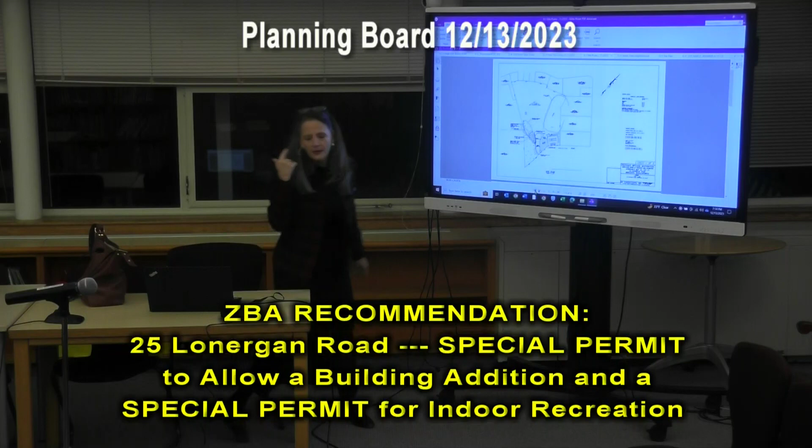So basically, this is 25 Lonergan Road. I apologize, Jill Mann here on behalf of 5H LLC, the owner and operator of the Paradise Golf Range, miniature golf and simulators, located at 25 Lonergan Road. So everybody knows it's that last right-hand turn if you're going out of Middleton toward Danvers, right between Fast Freddy's and St. Cyr Pool. It's all the way down the end. It's a very popular Middleton location for mini golf and driving range.

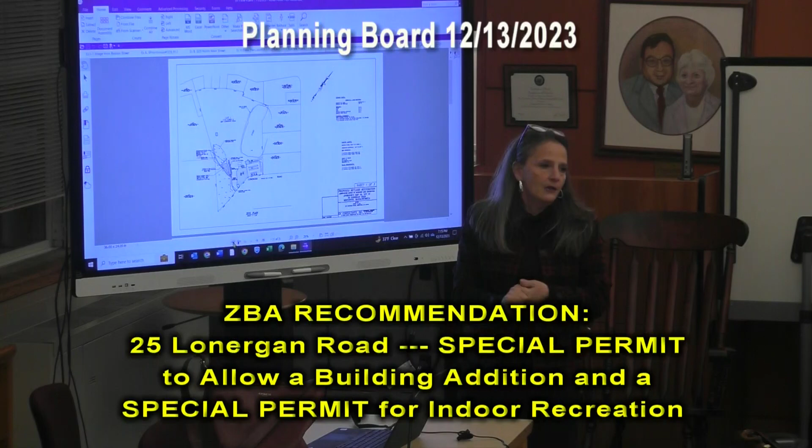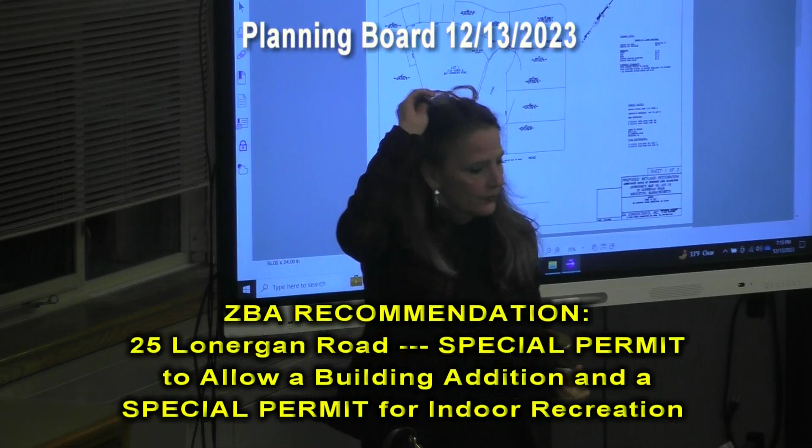So this particular petition is in order to expand the current simulators. Back in 2015, I brought forward a project for a very small building, about 1,000 square feet, with one simulator addition. We did that, and afterward the owner discovered these simulators are very popular, not only for lessons but also because people love to come in and play inside during inclement weather. This use is absolutely controlled by weather since it's all outdoors. So believing this is a good way to generate revenue, he's proposing an addition of 900 square feet to the simulator building, adding 2 golf simulators. I'm going to flip through this plan.

That first plan shows the general property. It's 17 acres, very large. It doesn't include the pond, but it's right next to it, and extends one property back from River Street. The property has a big wetland buffer and wetland on it, and there's a lot of floodplain in the area as well. But all of that can be compensated for and mitigated.

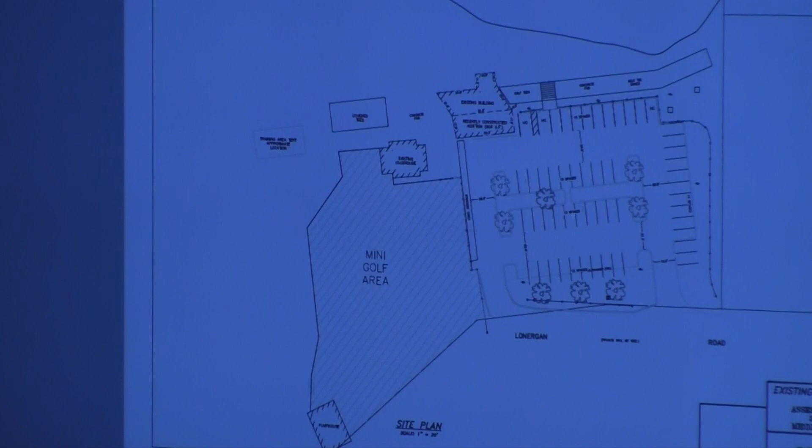This project did go before the Conservation Commission because there were issues relative to where the wetlands were, whether they'd been filled historically. So the owner went back to the Conservation Commission and got an order of resource area delineation, identifying where the wetlands are, and everybody's comfortable now. Ms. Kent pointed out that where they're trying to put the new simulator building, they're in the floodplain. But when you're located in the floodplain, you can compensate, just like with wetlands—you can fill up to 5,000 square feet as long as you replicate it in another area, and that's exactly what they're going to do.

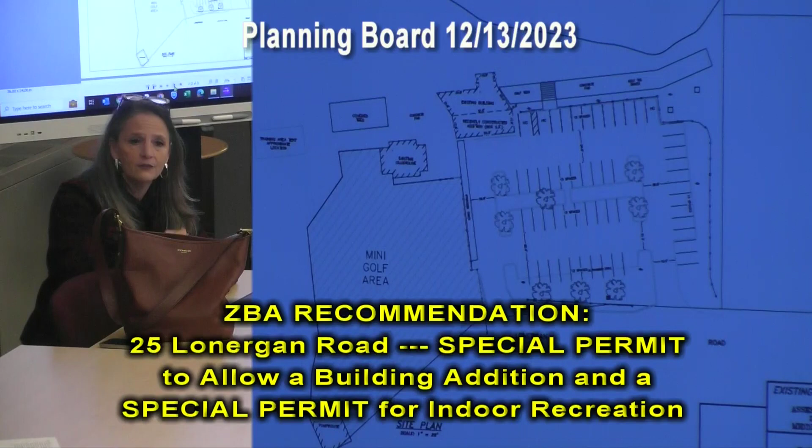Kristen Kent, the conservation agent, asked that we go through this process before coming to her, to make sure any tweaks needed would be handled in her subsequent order of conditions. There's already an order of conditions for other parts of this facility, and I'll file a new notice of intent for this particular addition as well.

So where the addition is located—can you see my hand? Yep, you can. Okay, let me make this bigger. So here you have the existing building, that's where the existing simulator is, and you see the recently constructed addition—that's because the owner might have started work before he got his permits.

He's been on a cease and desist and has not continued to do that, and recognizes that he needs to come before the committees and boards, and is doing so.

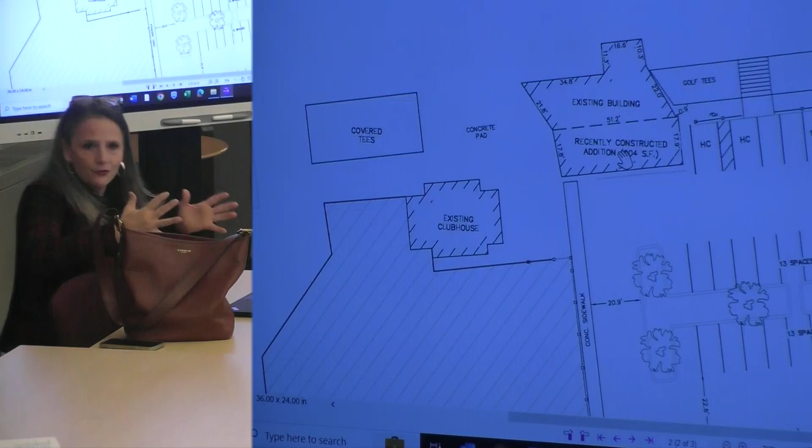So basically, all we're doing is taking that existing building, coming back toward the parking lot, and reconfiguring the parking to go from 54 spaces to 65 spaces. Why? Because when it's high time, they really do need the spaces. Although back there, you can park on Lonergan. It's not like parking on 114 or something else—there's space.

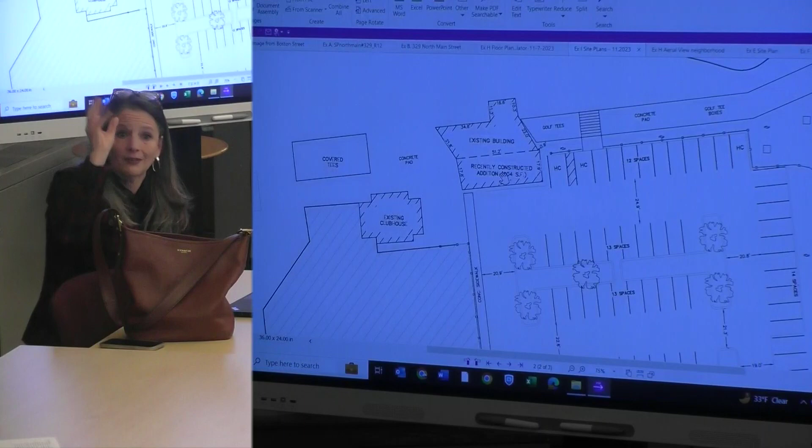But that's literally the whole project in a nutshell: adding a 900 square foot building and perfecting that site plan change, and then showing additional parking. And by the way, we're not increasing any impervious area. So as it stands, it's literally that property with a little attachment to the building.

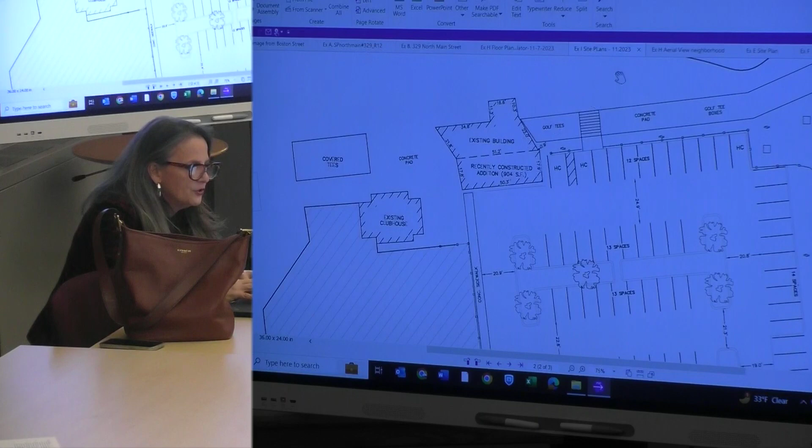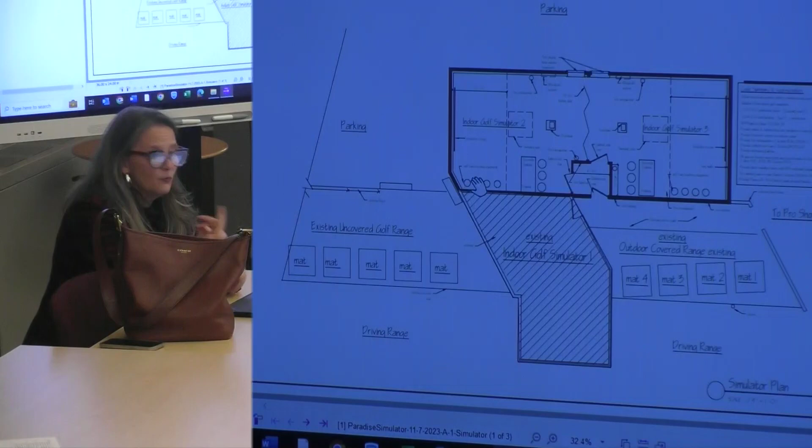I do have an architectural plan as well that I can show you. Here's a close-up of the actual insides of the building. On each side you have the driving ranges, where the tees are, where you hit the balls. And you can see where the existing simulator is, and where the proposed addition is—we show the two simulators. And then I can show you the actual building.

So it just looks like that—kind of pretty, looks like a barn. All the structures out there kind of look like a barn, very similar to other recreational uses along 114.

And that's really it. So we're going to the Board of Appeals tomorrow night. This particular request requires a special permit because indoor recreational use does, and then a modification to the existing site plan that had been approved in 2015. So if you have any questions, I'd love to answer them.

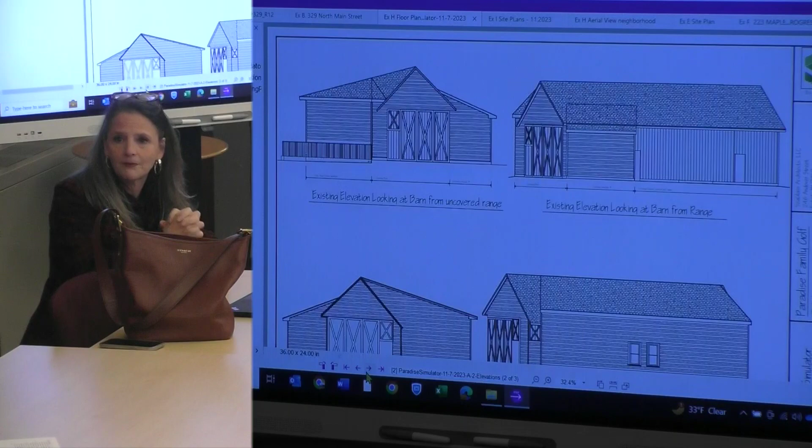I have a question—how many square feet are you recreating when you give them back on the other side, on the floodplain? It's 1-to-1 usually, but that's subject to the Conservation Commission—they can say they want a little more, but it always has to be at least 1-to-1 for floodplain replication.

And you have enough room to do that? Yes. It takes up other upland, so when you replicate floodplain, even though it might be out of the wetland, you usually have to replicate it in an upland portion. So you have to take land that is otherwise above the floodplain, dig it out, and make basically flood storage, so if the property does flood, there's another place for the water to go.

Okay, thanks. And it doesn't look like there's any food and beverage or anything. Not in that building—that building is purely the golf simulators. Now, similar to other recreational indoor uses with similar facilities, you can have food delivered or take it from outside. Same thing here—you can bring food and drink in and enjoy the simulators. But he doesn't have it in that building.

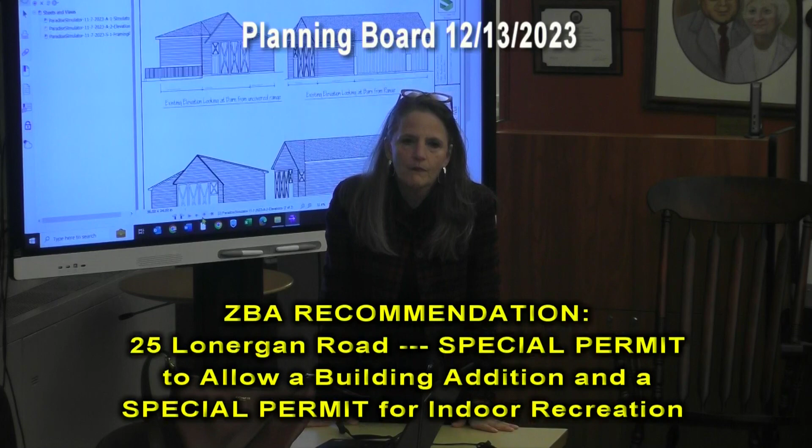Very good. Does anyone have any other additional questions? That's good.

So we will be making a recommendation in regards to provision of water, wastewater disposal, stormwater management, roadway access design and construction, as well as provision of utilities. In lieu of that, I will entertain a motion for a recommendation to the ZBA. I'll make a motion that the proposed addition is within standards.

Perfect, so Jason has a positive recommendation to the ZBA. Do I have a second? I'll second that. All in favor? Aye.

Thank you very much, appreciate it. Glad to hear they're doing well and expanding. Yeah, it's a great little facility. It's great for the wintertime too—people aren't going to be outside using the mats. Bring your daughter, she should learn to golf now, she's at the right age. I know, I wish.

All right, moving on to another ZBA recommendation for 223 Maple Street. The applicant is Middleton Management LLC, seeking site plan approval from the ZBA for a modified site plan for a new use, that being a liquor store.

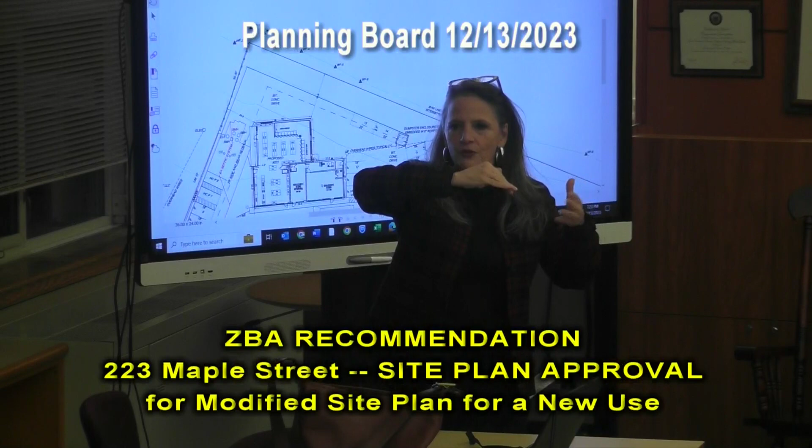Jill Mann here on behalf of Middleton Management LLC, the owner of the property located at 223 Maple Street. Everybody knows this property—it's the one that used to be run by Mike LeClaire. It's right across the street from Bouchard's, right next door to Magical Beginnings. It's a triangular-shaped property with 8 gas tanks, self-pumping.

Over the years this has been transferred to Mukesh Patel, who was a resident of Middleton. He and his wife have owned this particular business and rent out most of the units, including the gas station, which is rented to a third party.

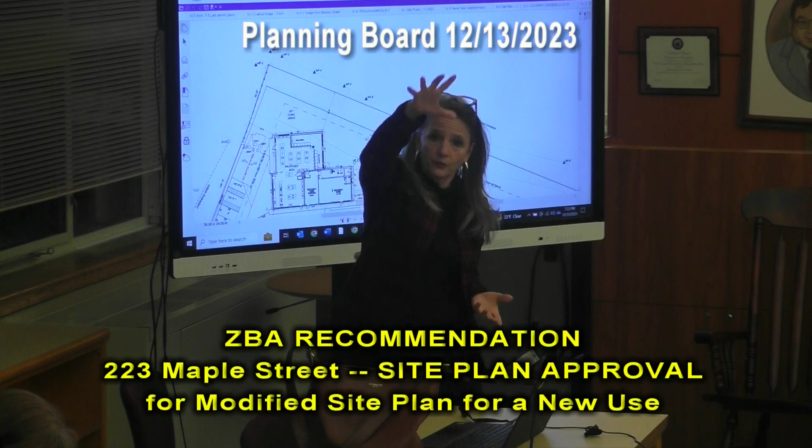Over the years, Mr. Patel has decided that he would really like to transition the property and try to get away from the automotive repair facility located behind the building. A lot of us used to go there—it's literally motor repair. The auto body is next door at Captain Pizza, but this was pure motor repair.

So the leases are up for the auto repair facility as well as that car detailing place—remember Pace? They used to be in the other segment of it. He is choosing to combine that automotive detailing business with the automotive retail business, taking away that industrial use and converting it to a retail store.

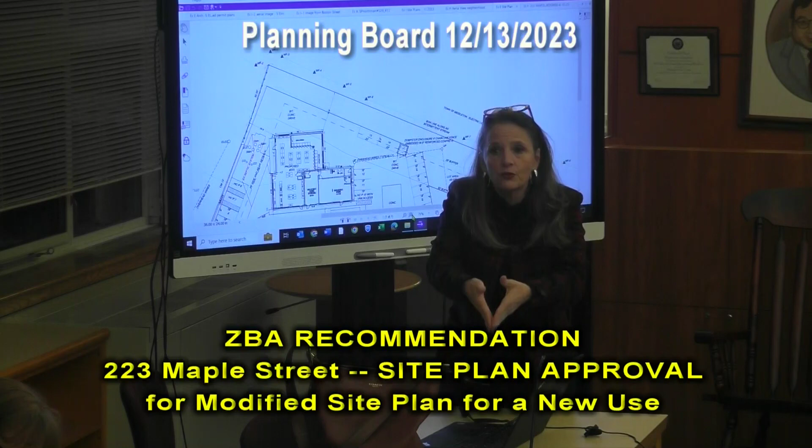Back in the spring of 2023, the town voted to have home rule petitions, which meant we got to add a couple of, I think it was 4, all-alcohol licenses—might not have been, because there was some beer and wine as well. So this was one of what we call a home rule petition that was granted to the entity that is now going to take over those 2 spaces. I think it's called MRU.

So there is an existing all-purpose, all-alcohol license for this property covering those 2 combined units, about 2,100 square feet. Even though it's an existing building and we're literally doing nothing to the site, it's a substantial change in use—you're going from that industrial use to a retail use, and now you're going to have people coming in and out of the building. So we're required to seek site plan approval or modification, because there was an existing site plan approval. There's no special permit necessary for this.

So what we've done is simply provide you the plans, which show 30 parking spaces. The original plan that was submitted showed less—only 23, because that's really what's required. However, when they applied for their liquor license, they showed 30 parking spaces, so we're required to comply with the conditions of that license, meaning there are 30 parking spaces on site.

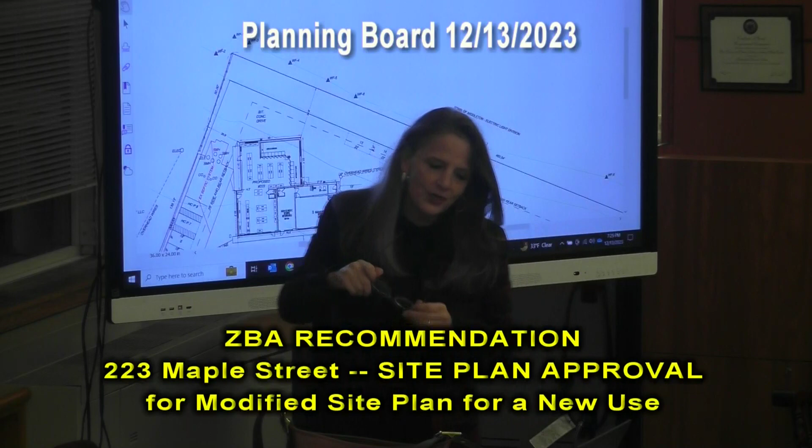I will note that the spaces have been slightly reconfigured along the back. Let me find the correct plan—I had it prepared in December. I'm just trying to locate the extra plan I set aside.

This is the new plan, sorry about that, it's up on the screen now. I did send this to Ms. O'Leary, so you might have it in your system, but I can't promise that you do. The plan before you with the 30 parking spaces is the correct plan.

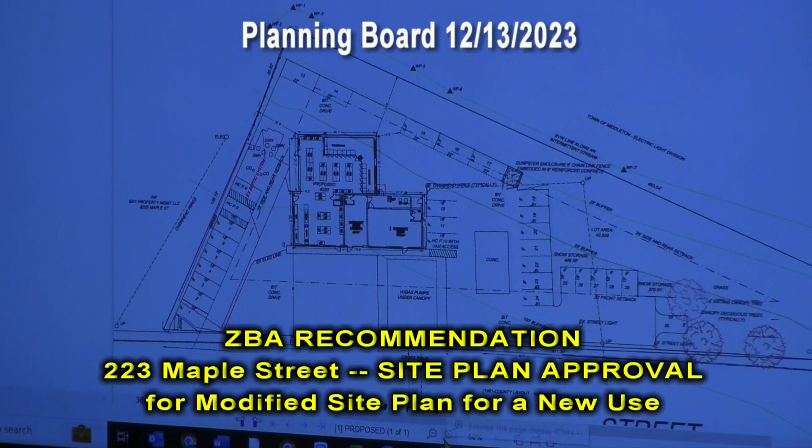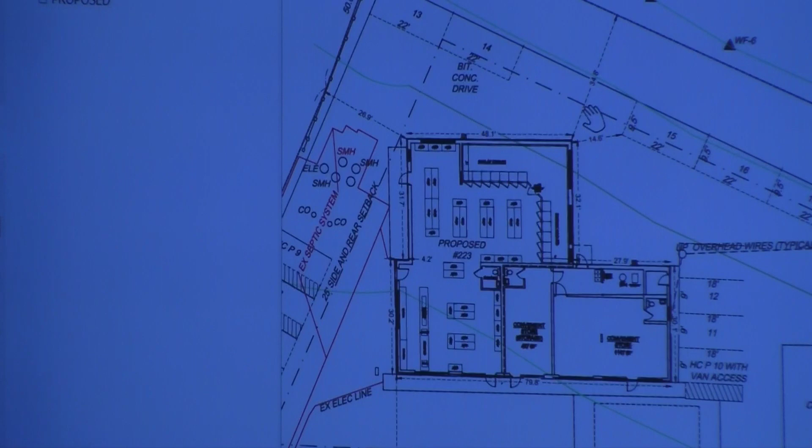I'll show you where the old uses were—this unit here with basically their liquor shelves, and there's the combination of the 2 buildings. What we did was reconfigure the back parking spaces so that they didn't have any interference from projects going on around the site. That's why.

Is he planning to operate the liquor store himself, or lease this out similar to how he leases the other spaces? Middleton Management owns it, so he's leasing it to another company—it's an independent arrangement. LLCs are considered persons, so yes, they're all arm's length deals with another company.

So the purpose of tonight is simply to say, pursuant to the application, there's no modifications to the outside. The stormwater management plan continues to be in effect. The septic system can handle the flow. As far as lighting goes, it's the same lighting that's there presently. We're not proposing to do more.

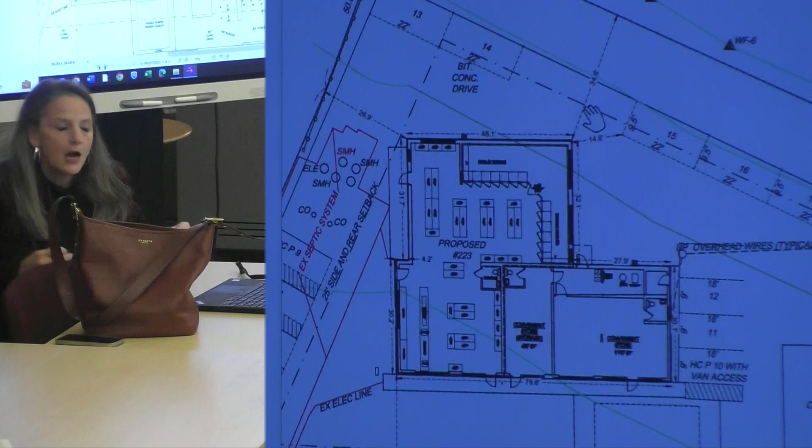We'll have probably pedestrian lights over the doors of access on the side where they hadn't been, because the main access for the liquor store is actually right here on the corner. We have one front access, but because the parking spaces are on the side, people are going to enter through the side.

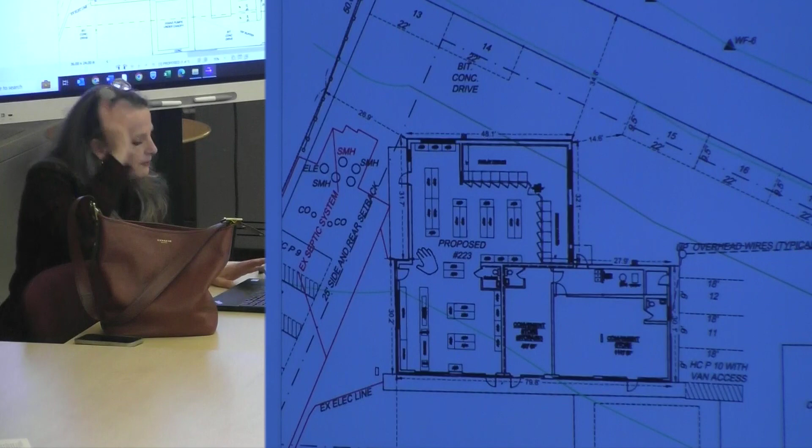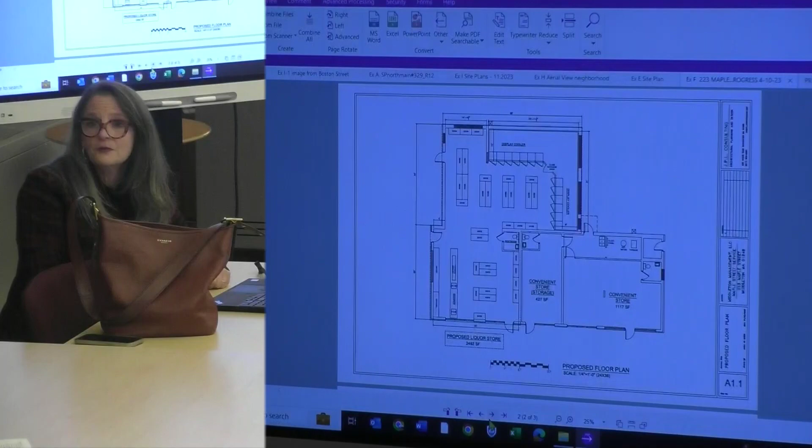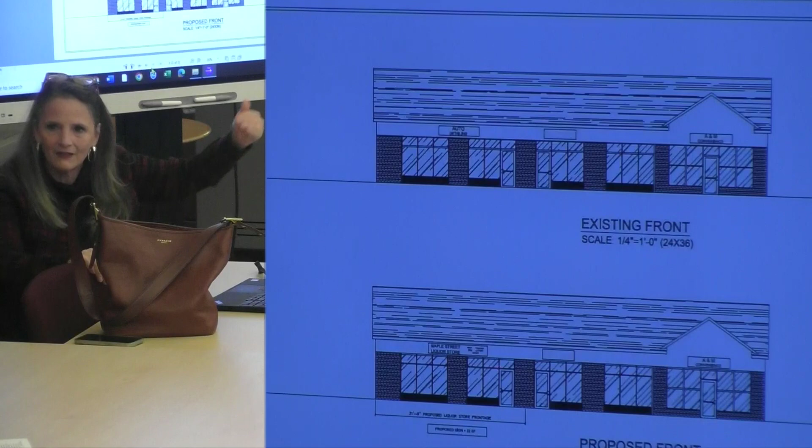For the most part, it looks pretty much the same, doesn't it? It'll still have all the glass, just now there'll be signage over that one door. On the side, if you've ever been there, it has an overhead door where they used to pull in for the detailing, and behind that the buildings, so it'll all be standard retail glass. That's basically it for 223 Maple Street, if you have any questions.

Hearing none, I'll entertain a motion to make a positive or negative recommendation to the ZBA. I make a positive recommendation to the ZBA to approve the proposed change. Do I have a second? I'll second that. All in favor? Aye. Passes unanimously. Thank you very much.

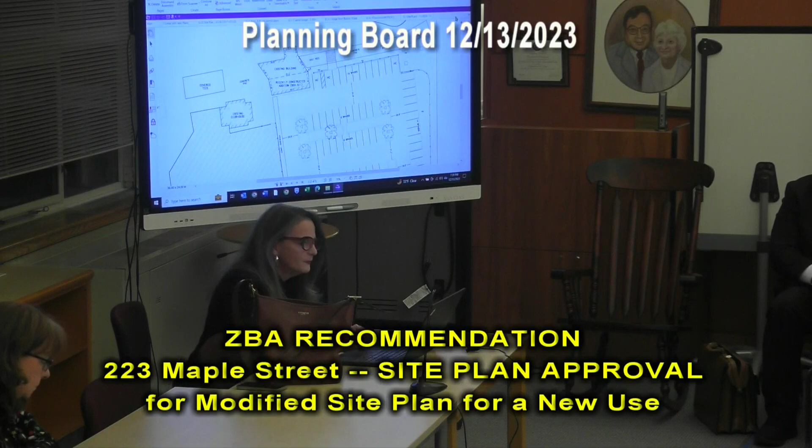And we have one more ZBA recommendation to make for 329 North Main Street, application 189 North Main Street LLC, looking to make a modification to the special permit and site plan approval allowing indoor recreational use for a pickleball court. Good evening, Jill Mann here on behalf of 189 North Main Street LLC, the owner of the property located at 329 North Main Street.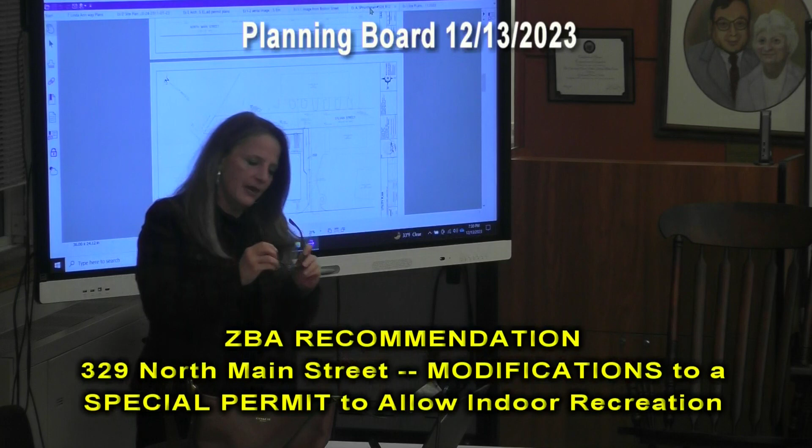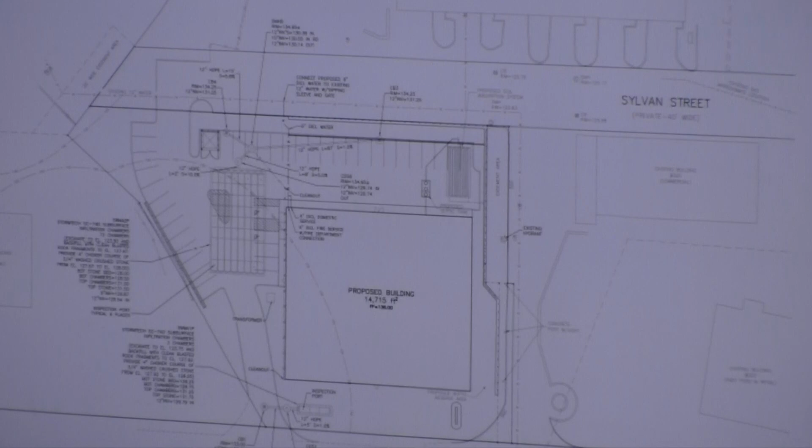This particular property was approved in January 2023 as 8 contractor bays. Over time, Mr. DiGiorgio, who's the principal of 329 North Main Street LLC, determined that maybe it was going to be better if we could have some sort of a different use than contractor bays, because we've been hearing rumblings that people, if possible, would prefer to see something a little different along North Main Street.

Now, I can assure you it's very difficult to do that on vacant properties because of the 100-foot setback. It doesn't really bode well for things in that particular area because it's such a restriction. But this particular property, if you remember, was a legally existing non-conforming property, so we did receive a special permit that allowed us to build within the 100-foot on this property. So it actually works out great for this type of recreational use.

And what it is going to be is pickleball courts, indoor pickleball courts. That's the current rage, and it's a great use because it really suits Middleton's need to try to get properties on North Main Street to be something other than heavy industrial. It also suits the need for physical activity - there's a place for adults to go have fun that doesn't involve a bar. It's tough to find places like that, and this one will actually suit that need.

And I do have another one that's actually up that's for children. I'm noticing a lot more indoor recreational uses for people - that's becoming a more prominent desire on the part of developers, landowners, property owners, and thank goodness business owners. It's coming back. We had a bad time for a while since 2019, and I see a change. That's really great for Middleton.

And this particular property, as I said, is very well suited. The building itself is still going to be pushed back from Route 114 more than the previously existing building. Instead of being, I think it was 50-something feet setback, the old building, this one will be 61.9 feet setback from the center line of 114.

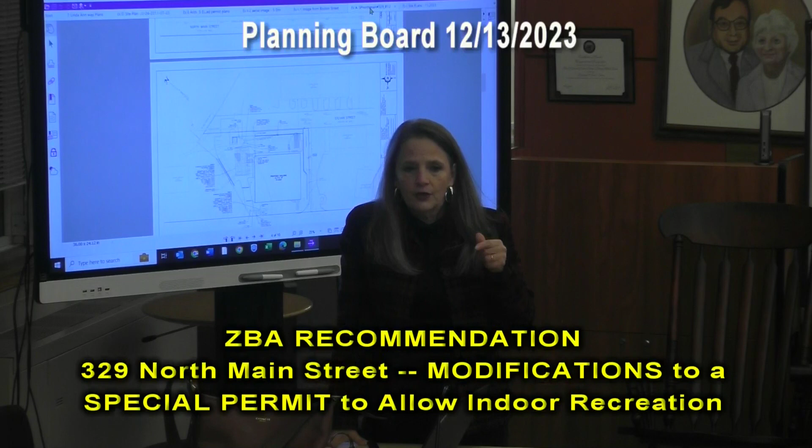But what's really great about the way Mr. DiGiorgio is developing it, as you can see, is all the parking's in back, all the entrance points in back, which allows him to actually put in a building. I'm going to go to the landscape page.

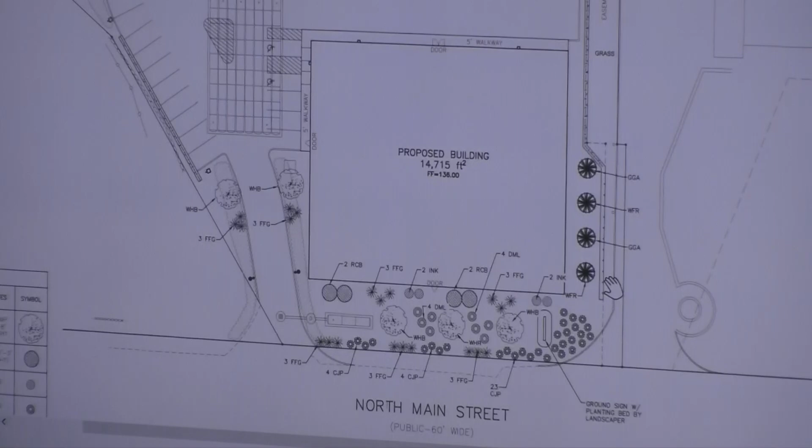Put in a building that has a decent amount of buffer via landscaping, you can see it here, which you normally have a hard time doing if you have to put parking in front, which is what was done with the contractor bays, because there was no other way to do it unless you put the parking in front for that use. So we were able to take all that hard top and pavement and put it behind, and then put up all the landscaping.

And then the actual visual appeal of the building, you know, it's still a pickleball court, so it's not as... that's the wrong one. It's still a pickleball court. I'm trying to find the architectural plans, I think I put the wrong ones in, so I have to go somewhere else to get it.

But at the same time, he's able to put in a building with faux windows, and it's really a good-looking building. One sec, here we go.

I see that there's signage proposed that says New England Pickleball Club. Is this going to be for public use? Or is this private membership, only you call or rent the courts and go for it.

And is his plan to host any kind of tournaments or events? There are only 6 courts, so you can only have 4 people per court. And I see in the plan he's got a viewing area and a pro shop for merchandise.

But the point of that is when people come in, it's a very small area in front, so when you have that transitional period, people will come in, and a lot of times people will either have a racket or bring somebody that doesn't have a racket, so it's great to have the sales, because people will buy them, but it's a very small area in that front part.

And then the total occupancy for the building is limited to 100 people. You can't have more than that. That's literally the occupant load.

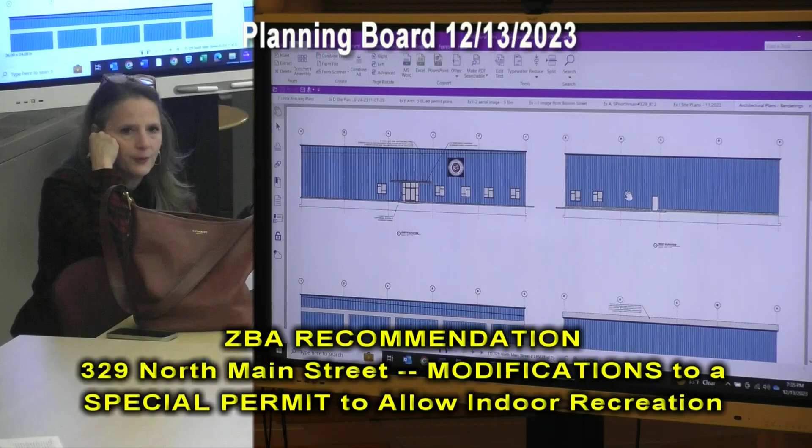And then the other thing is we anticipate 4 people per court. And what we do is take that 4 per court and multiply it by 1.5. So we even provide more than enough parking for what we're anticipating on site.

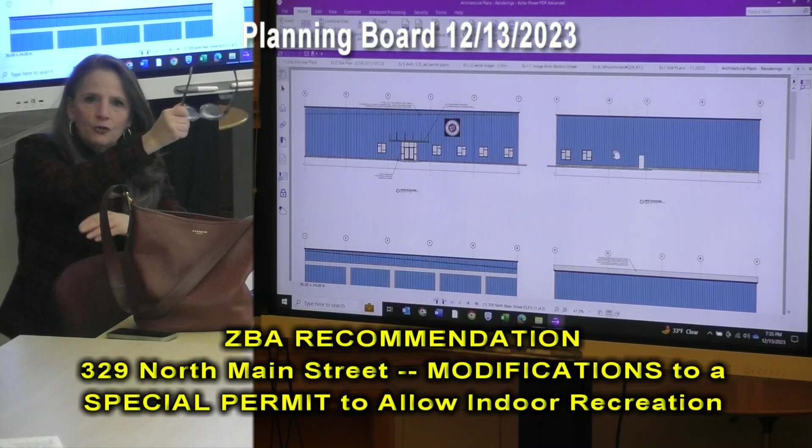Tournaments, I don't know how you'd have a tournament with 6 courts. I guess you could all play rotating together. But I noticed that there's no locker room. There's obviously a restroom with a shower, but I don't see lockers.

And that's being talked about. So when I did my research about whether or not you had to have a shower, and Mr. Bernhard's going to know this better than we do, but it looked to me like it was an A3 use, so that's just how you categorize it for the plumbing code or building code. And the A3 use said you didn't have to have showers.

But the A5 use says you have to have showers, but Jason, I could not understand that section of the code. One particular use table said it was outdoor gymnasiums, and another table said it was fitness. It was the most confusing CMR I've ever read. It's not well written at all.

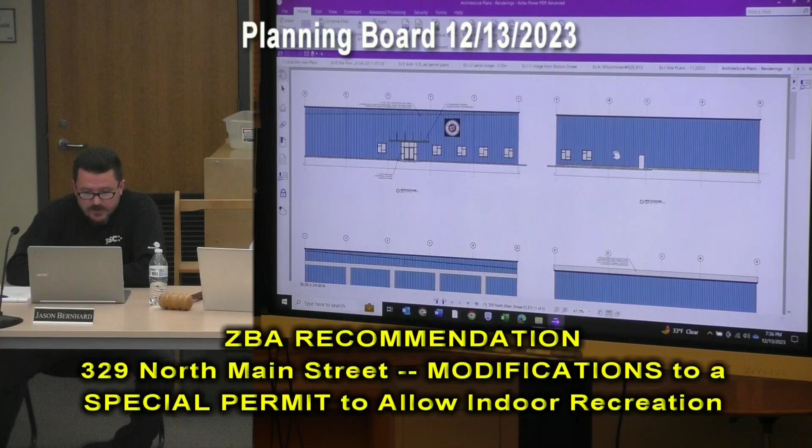The rule of thumb is usually if you're having something like this, you put showers in. Ralph has been talking to Scott Fitzpatrick, and I think that's why you see the shower, because he thinks he has to. I think nobody really wants to put that in, but he may have to.

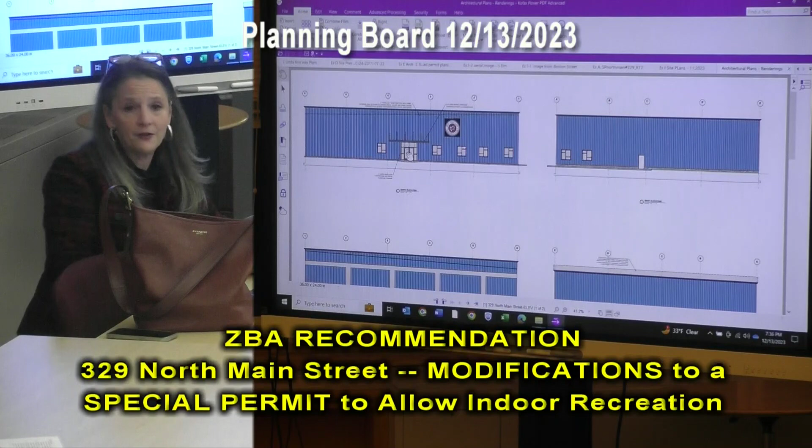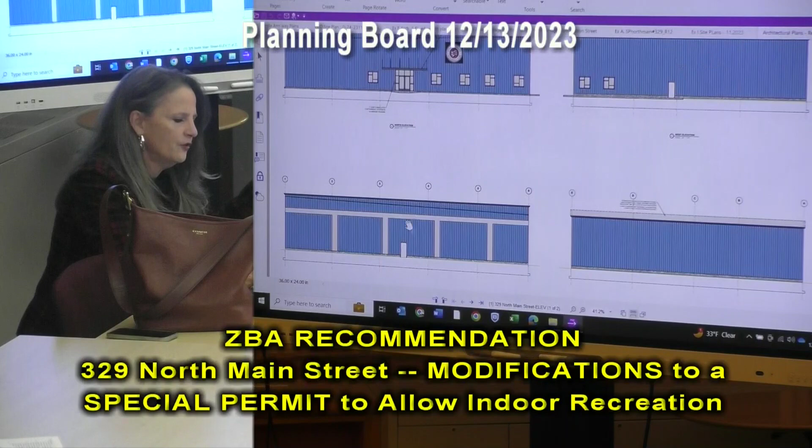Okay, and then here's the vision. So when you see the doors, you see the front. This is, believe it or not, the back of the building. That is not the front, that's the back, because that's where all the parking is. And this is actually the rear of the building. No, this is the rear, I'm sorry, this is the rear of the building, because you have to have egress, right? So this is the rear, this is the front, and that's where all the plants will go.

Is he putting a sign on the front of the building, or on the side? There will be a sign, I think, on the front of the building, like the normal wall sign, facing route 114, over the front door. So we're probably going to end up eventually having to get that special permit to do 2 signs. We just didn't do it yet.

And that, I don't know if anybody has any questions.

Just on the showers, if Ralph has to put those showers in, do you have the septic capability there? Yes, Title V has a section for fitness with showers, fitness without showers, fitness with cafeteria, so they have to comply, and it'll be a newly installed septic system that meets all of Title V guidelines. Ms. Mello will be all over that. I think that's why there's been discussions between Ralph, Mr. Fitzpatrick, and the plumbing inspector, because they're trying to figure out what really has to go there.

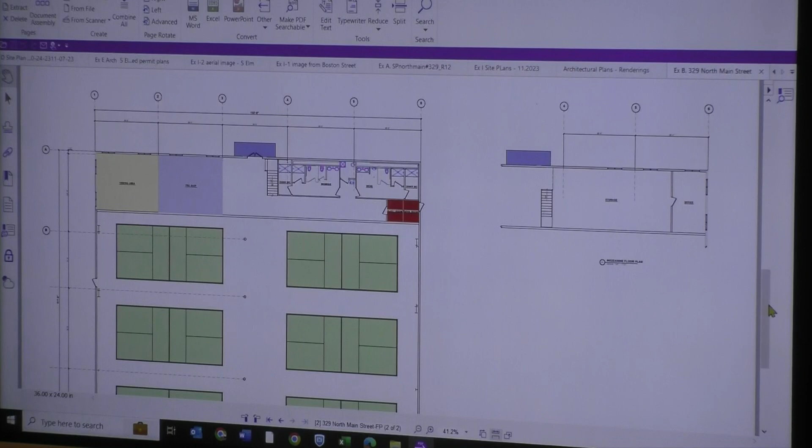What type of roofing is this? This is what Mr. DiGregorio was talking about in the front. I think it's just gonna be a standing metal roof. It looks flat, but I think probably there'll be a little pitch. So if there's no pitch at all, it'll be rolled rubber. If there's a pitch, it'll be metal. So it actually looks like it's gonna be flat, with a little pitch, you know how they do that.

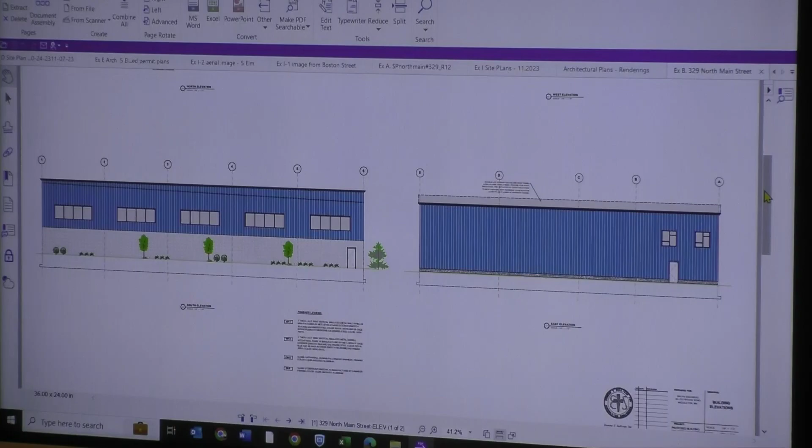I don't have any questions. Yeah, I was just looking at the lighting plan too. It looks like there's very minimal lighting in the front part of the property near North Main Street, other than where the sign is gonna go. Exactly, sufficient lighting in the back and the parking area where the front entry is, along the side as well. Right, there's very little lighting, only because the use doesn't call for it.

I can get to it. And like you said, with 6 courts, I don't see traffic being much of a problem. Right, and if you notice in your package, I had a traffic assessment put together. When we were doing the contractor bays, people are always curious what this is really gonna mean, so we did a full-blown traffic report in January 2023, and had her bring it forward. She said you're not even gonna generate that many peak trips, because in the morning you're not gonna generate almost any, and in the afternoon it'll be after-work people, at the tail end of peak evening, but that's when they'll do all their business, weekends and evenings.

We did get a comment from Chief LeColst, and he said we would need to see the fire turning radius. We gave it to him, and he signed off, issued an email saying this turning radius is fine, you provide sufficient turning radius to get in and maneuver around. Also located right next to this, while we don't have an easement right over it, for purposes of emergency, any kind of emergency vehicle is able to access any property, anywhere, anytime. So there is a driveway on the side that if necessary, the Middleton Fire Department could also go up the side of the property.

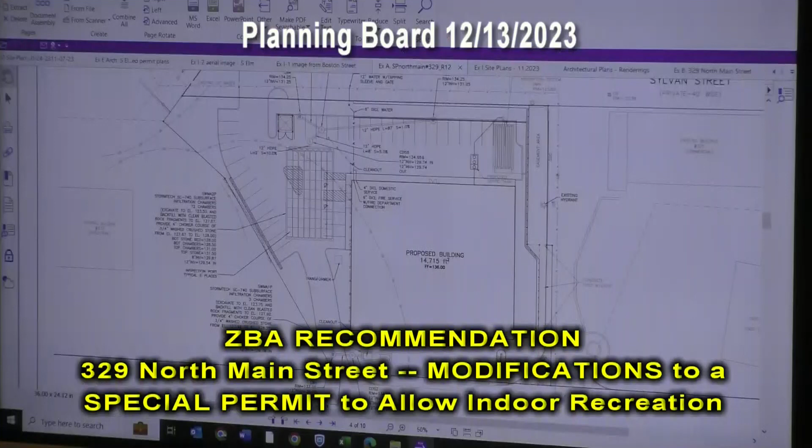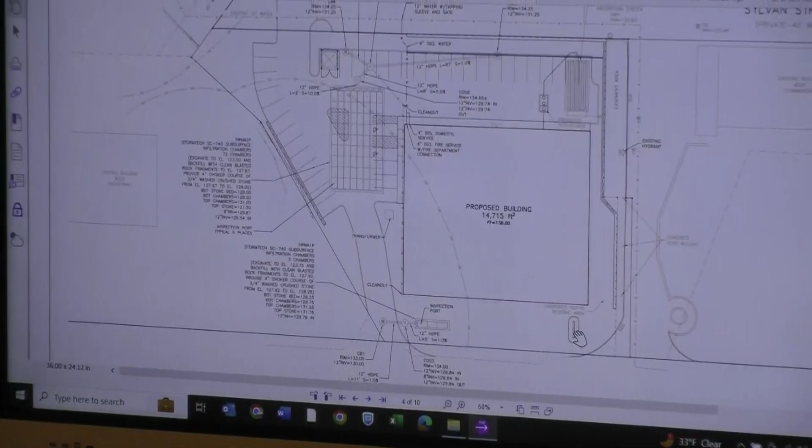Any other questions or comments? I will entertain a motion for a recommendation to the ZBA. I make a motion for a positive recommendation with the condition of the additional AED or defibrillator for the proposed site plan at 329 North Main Street. Do I have a second? Second. All in favor? Aye. Any nays? Passes unanimously.

Thank you very much. Should we try one more time? No, I just got a response back. No response? Mind if I step out, make a phone call? Please, try and get him here. You want to adjourn a little? I don't think anyone wants to push it to next month. You can deputize someone. No kidding, it doesn't work like that. Get someone to swear in real quick.

Try not to keep the public waiting. All right. Yes, and then you introduce yourself. We're ready to start, thank you for joining back with us.

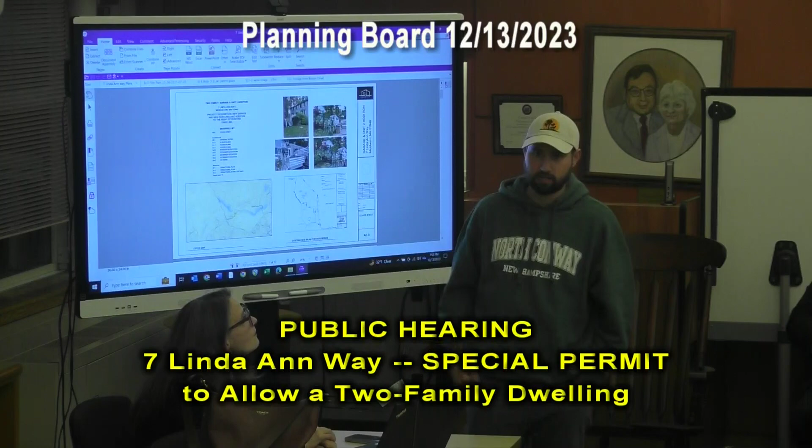I'm Andrew, nice to meet you. Hi Andrew. What we're doing here is an addition at 7 Linda Ann Way in Middleton. It's an existing 2-unit with a unit in the basement. What we're looking to do is build an addition, moving that unit into the addition. I believe we meet all other zoning requirements other than the second unit that's currently existing.

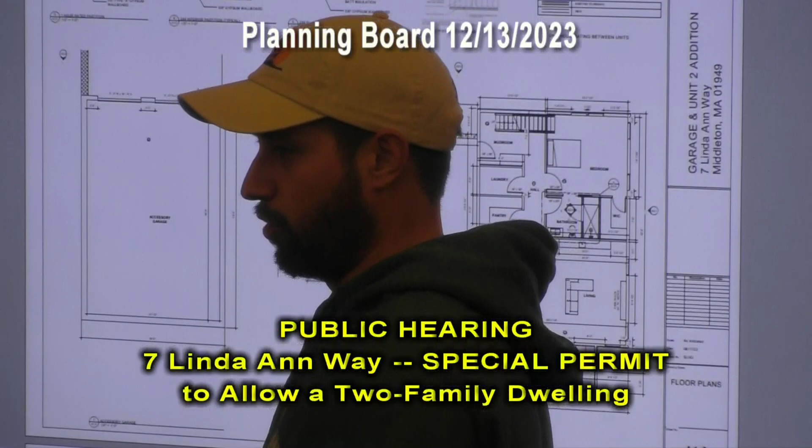That's the floor plan of the second unit. It's on the first floor, which is the same level as the basement currently. The second floor of our addition above this will meet the first floor of the current house. That's kind of the gist of it. I can go into more detail if you have any questions.

My only question, any changes to the driveway entry into the property? I know it's set back pretty far, right? Not besides, we're gonna have to take up some driveway to redo the septic. Okay, but the layout of the driveway is not changing. Very good.

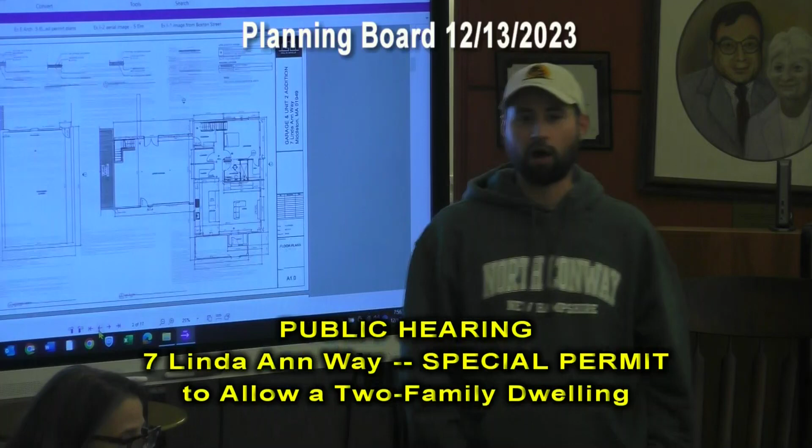That was the plan I was looking at. So this is going where the existing deck and stairs are, correct? Yeah, it's going off the side of the house. Basically, if you walked out that slider, you'd be walking into the second floor of the proposed addition.

Underneath that would be the garage, and to the right of that garage would be Michael's new unit. He's currently living at the house. There's no new people moving in or anything like that. But that's exactly where it's going.

And it looks like all the setback requirements are met. Yeah, 30.5 feet being the closest. Oh, it's going really slow on yours because I have to go through that. I can't get... I'm trying to get it so they can see it, and I'm having a hard time.

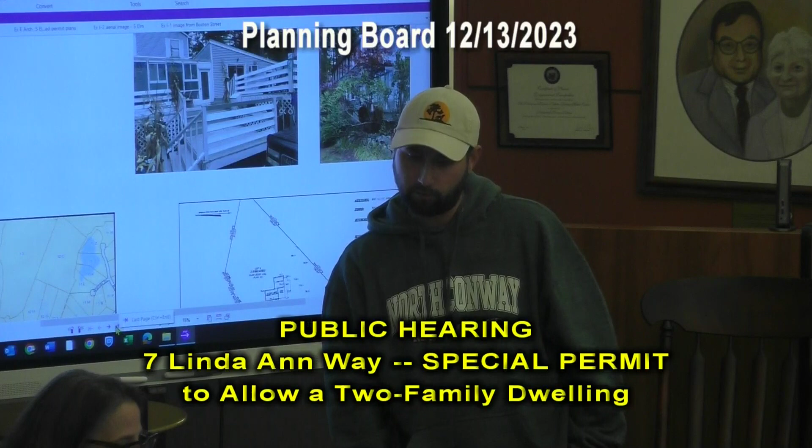I think if you go to the final page, it has the setbacks. The proposed, yep, final, the one before that. Yeah, see, it's not. And did you say this is going to be one septic system servicing both units? Yeah, and it's gonna already be separately engineered. Okay, one more? Yeah, if you go up one more, it's the site plan. There you go, yeah.

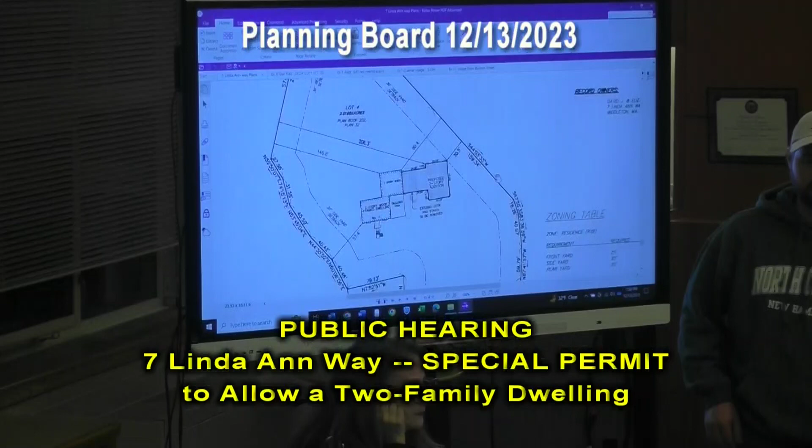That help? Yeah, we're adding a bedroom, so we redesigned the septic, and it's already been submitted and everything. We've already had stormwater engineered as well, submitted to conservation.

Pretty much an open, closed case, I would think, right? There's nothing, yeah, they sent all this in the packet.

So I will consider a motion, taking into consideration that we're reviewing this as part of section 9.4.2 of the zoning bylaw, which says the adverse effects of the proposed use will not outweigh its beneficial impacts to the town or the neighborhood. Community needs are met by the addition of more affordable housing, this being multifamily housing, which is needed in town. It will have no impact on traffic and pedestrian flow, safety, and parking needs.

The needs have been met from a pedestrian flow, safety, and parking standpoint. The property is located on a public way, and the home has been used. There will be no additional occupants to the property. The lot is serviced adequately by utility connections that will be expanded to suit the needs of the individual units, with the new septic system, which has been approved by the Board of Health for 6 bedrooms.

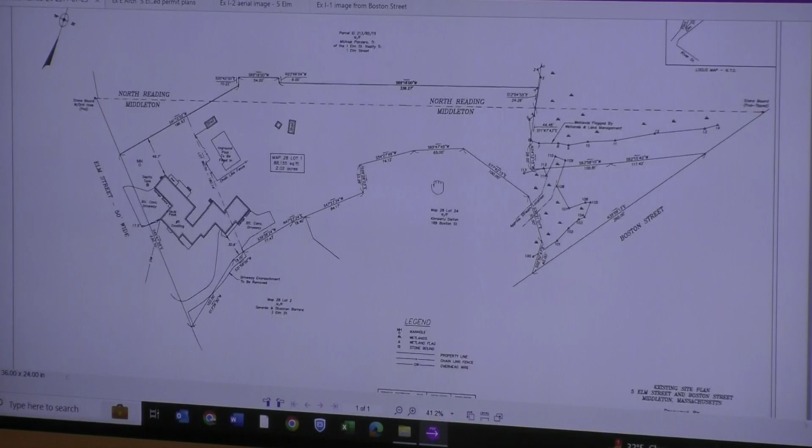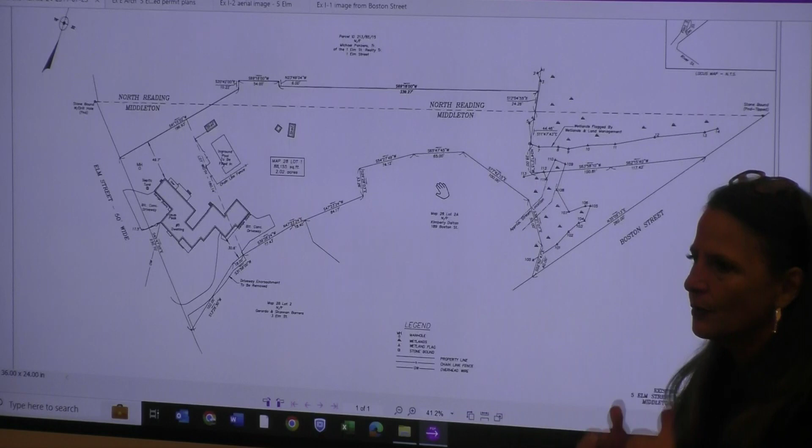This piece of property back here is what is still owned by Peter Madden. This property is all owned by Mr. Pizarro. I believe he came in, if it wasn't last month, it was a couple of months ago, for the ANR plan to basically create the lots into different segments. He wasn't really sure how he was going to go, and then he decided the best option really was to actually make this a 2-family versus trying to do some other things with the combination of the lots.

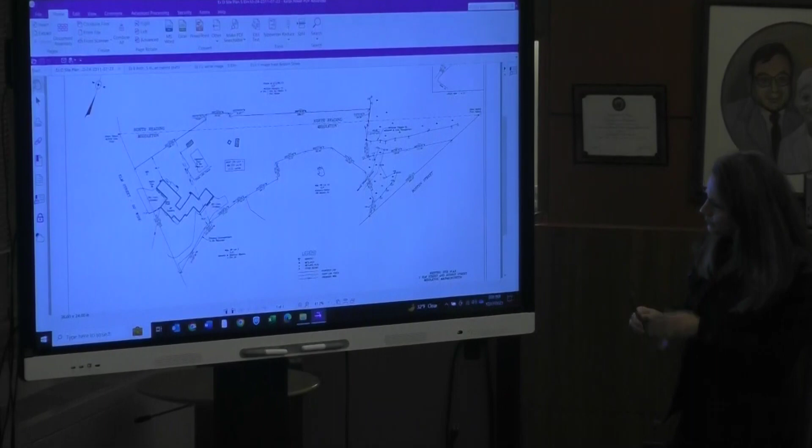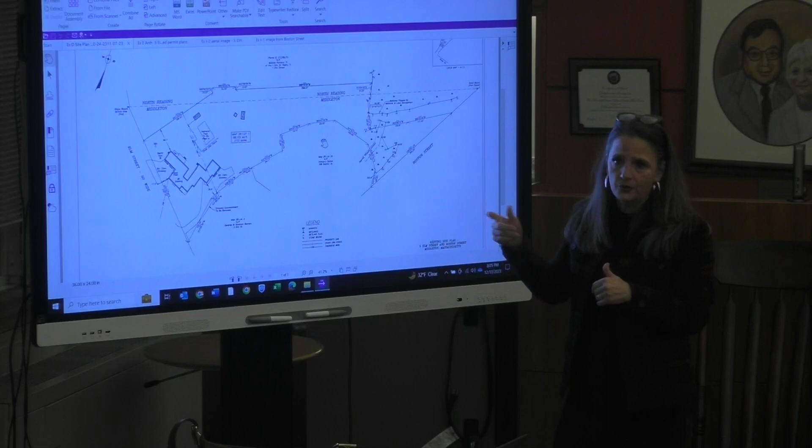So the property you have here is the property that will be affected, and I had included all the deeds for that. It is a legally existing non-conforming lot because of the front setback, but everything else, the property meets all side setbacks, including both of the attached garages. It's over 30 feet from the sidelines, and it obviously continues to meet open space requirements.

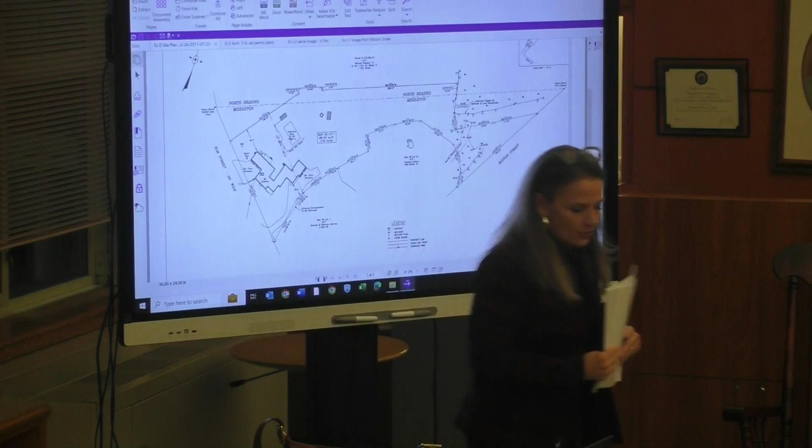The property is actually 88,000 square feet, which is twice the required amount of area in order to have it become a legal 2-family. I did prepare, and I don't know if you got it because of the circumstances, but here is the decision that Katrina always asks me to provide you with a draft, to make that kind of voting a little smoother.

It looks like this - both driveways are going to remain as is. Everything remains as is. The only change - I'm going to show you the inside of the property. The only changes are to actually create those separating party walls, because when you create a two-family, you have to make it so that you can't transition between units. They have separate utilities, everything has to be separated, and that's what Mr. Pizarro's plans are that you have in your package.

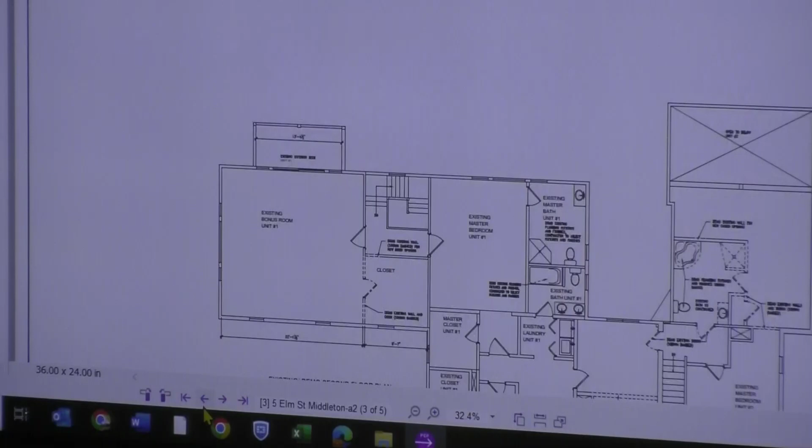So I'm just showing you right now the first floor, the second floor. I'll go show the first floor, show you the separation walls. Okay, here we go. I'm telling you, I am not good - have you noticed that I just keep flipping? One sec, I'm going to do it more slowly, and make it smaller so that I can see everything.

Okay, so here's the existing floor plan, and you can see there's no separation, but there are internal staircases, and there's obviously the exit doors, which exist today. So when you look at this particular plan, you can see where there's a front entrance to one of the units - that'll be the second unit, the smaller unit - and then there's the entrance for the larger unit.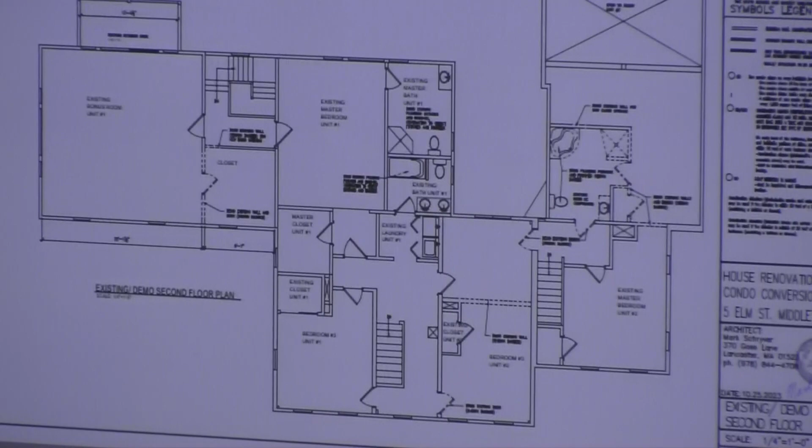Here's again the existing floor plan for the second floor, and now here you have the proposed floor plan for the second floor, where he creates that wall and then allows for staircases to go up to the second floor.

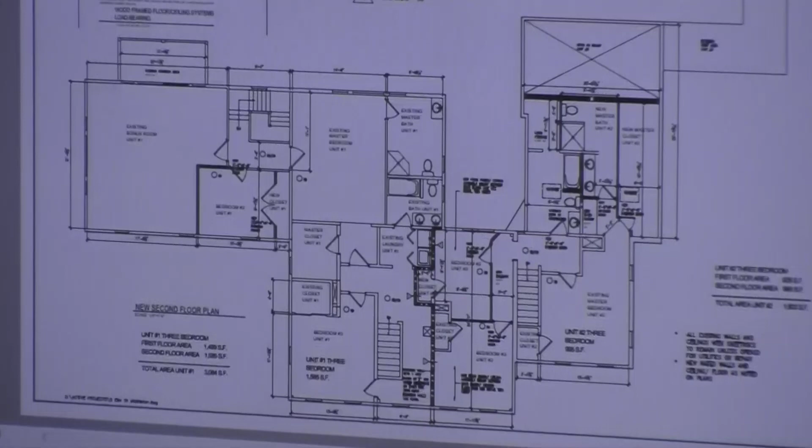I know normally you don't get this much detail, but it's pretty unusual for somebody to take a very large home, at least around here, and do this conversion. Typically what we're doing is what happened in the other project, where you add on. Here, there's literally nothing being added. It's all internal reconstruction and renovation work.

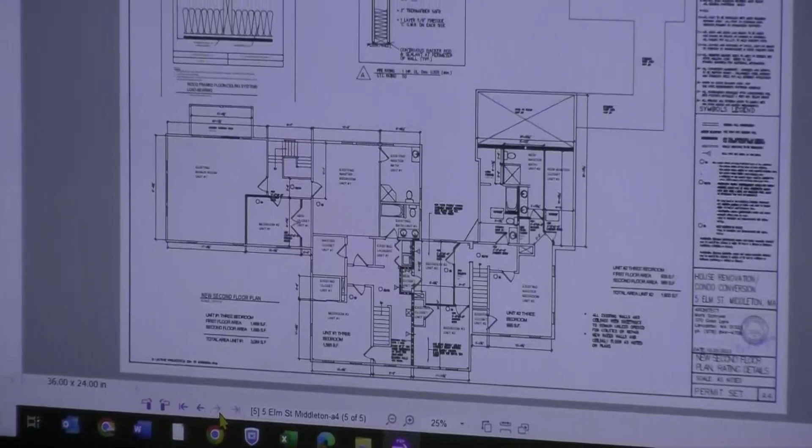So if you have any questions, ask them of me, and I know the public is here too, because I know Mr. Mills is in a bit of a hurry on the North Reading side. But if the board has questions for either me or Mike, we're here to answer them.

Is the plan to make this adjustment for resale purposes as condos, or to hold? It just depends on the market right now. Right now there aren't any condominium documents, there's been no movement toward that, so it has to be rental. Sometimes you're able to sell it to a family with a mother-in-law situation, so that happens more frequently lately than not. In that case, the family can make the determination. At this point in time, we don't know. Not right now, but it definitely can be.

The property card will stay as is, you're not gutting it to the studs, so you're not getting a new year of construction. I think the year of construction is 1752. Yeah, the initial year of construction is that.

So what will happen is Brad will actually create two cards for one property. So if you were to go look, he'll show Unit 1 and Unit 2. I don't know when it's not condo'd, I think he assesses them together, but he still will show Unit 1, Unit 2.

And that's why - so really it sounds crazy, right? But anybody who knows condominiums knows that when you have one big home and then you subdivide it, the second you do that, you increase value. The sum of the parts is definitely greater than when you just take it as one big parcel.

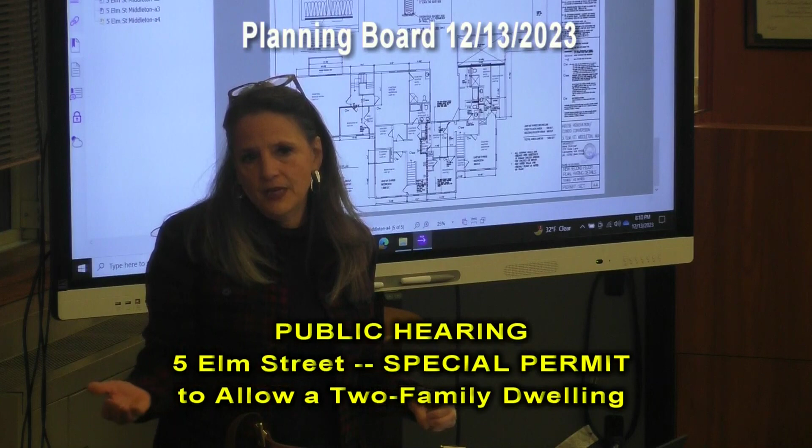And as I said, the modifications continue to serve all interests - there's absolutely no change. In the plan we looked at in January, I believe it showed the sheds in the backyard were going to be razed. So that's still the plan - everything's coming out. The only thing that's remaining are the attached garages and the home, that's it, right?

The pool's gone, and then there's sheds - there was a pool shed there. There's a pool shed there still, the little house I think is going to be torn down, and then there's another shed. The pool shed's in pretty good shape, I might have been using that as a shed, but I'll take it down, it doesn't matter to me.

The pool's filled in now. The septic's complete. So it is a six-bedroom, and Ms. Mello has reviewed it - it's 3 and 3. So they have two septic systems. No, one septic system. Two pumps though, I'm assuming you have 2 pumps, you know, you have to have someone come out and check.

Very good. We have a draft finding. We have to review the evidence. Would anyone like to review that? And I will entertain a motion. You could ask if the public may want to speak. Anyone from the public wish to speak, please?

Hi, good evening, members of the board. Dan Mills, 5 Green Meadow Drive, North Reading. Just had a couple quick questions. The plan that was shown, was that the latest plan showing the division of the lots that took place last year? I believe the lots were combined, right?

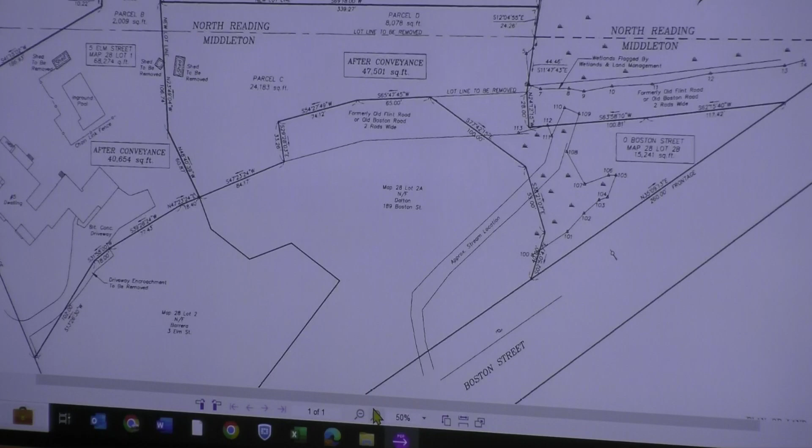So here we are. Originally you had these lots - this is how Mr. Pizzaro actually cut it all up. And then he had this piece that is Peter Madden's. So this is being combined, this lot's being combined, and this lot remains. So see how we created all these little parcels, but the outline you see here - I can split the screen. If I could just approach the board here.

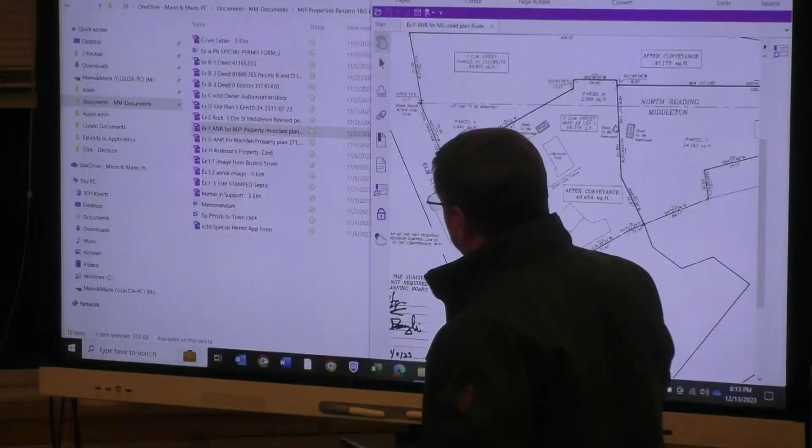So these lots are now combined? These lots are combined, mm-hmm. If you go to the legend - go to the one that shows the new proposed. This was a new lot that was developed last year, correct? You mean subdivided? This new line was - it says right here, new lot line. Yes. So that was in place, and now you've actually gone back and taken that line out? Yep. Okay, so this is one lot, yes.

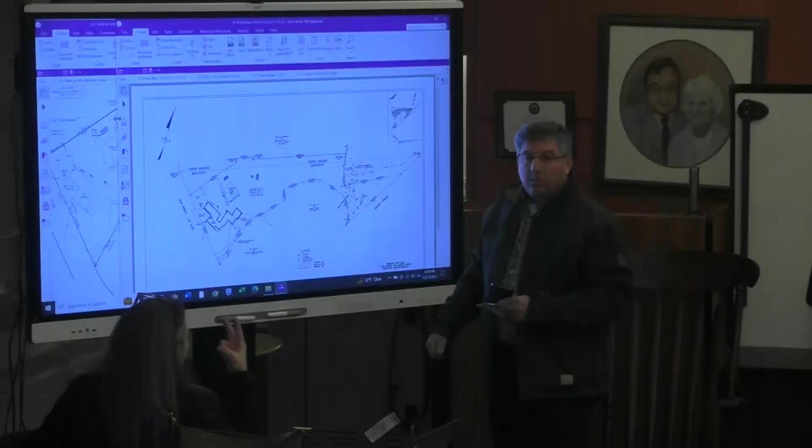And where was it - originally for 2 single-family homes to be put. Yes. And the new request is for the lots to be recombined in order to make a two-family instead of 2 singles. Right, because in Middleton, to have a 2-family, you need twice the area. So that's why, when we did this, we had to combine the other properties, and quite frankly had to acquire property from Peter Madden to make it up to the 80,000 square feet, which actually is 88.

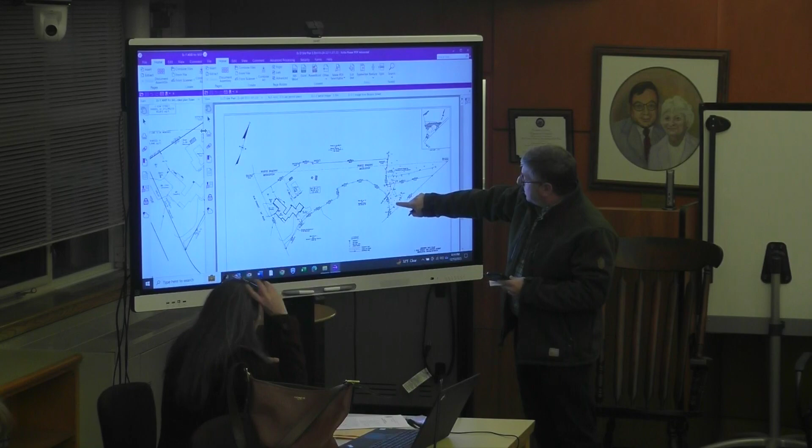Where is the end property line over here? I'm not seeing it - it's shown on another plan, because we wanted to show the board the complete plan. So here's the Madden plan. Oh, it's even harder to see, let me blow it up so you can see it. Okay, so Peter Madden's property is this big piece right here, and see this dividing line? Yep, that's what we're buying. Is it clear to you?

Yeah, okay, so I was confused because I thought I missed a step in between where they had the new lot line separating it to have 2 different lots. Sounds like your concern was that they would build the 2-family and then build another lot basically, to have 3 families? Oh no, we have to combine - you have to have this acreage.

So that has not been done yet? So the way it works for zoning is, I don't have to do anything - I can just show it on one plan. I don't have to go back and file an ANR plan to pull it out. If it's held in one property and there's a special permit decision filed at the Registry of Deeds combining it, it's done, and the assessor will combine them. There's no ability to regenerate that line unless I go back in and change it from a 2 to a 1 again.

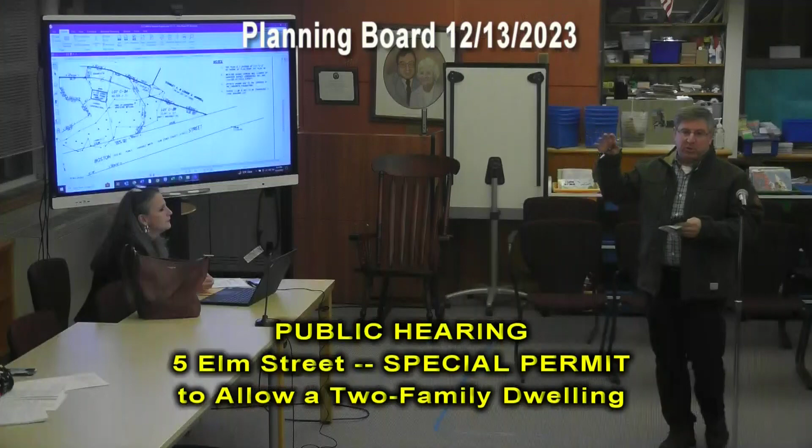Okay, do you see my concern? Yeah. You're confident that I shouldn't be worried about another structure being built on that other lot? Yes, they don't have the square footage to do that. Once they needed to grab that extra piece from Mr. Madden to allow them to even do the two-family, there's no way they'll have enough square footage to put a single family between that current home and your home, perhaps - I don't know where you live, but let's just say for example.

There's not a concern on that, they can't do it. Okay, very good, and I appreciate your answer. My question is, is there any additional tree removal or shrubs being removed? If anything, I think you added landscaping last time I went by.

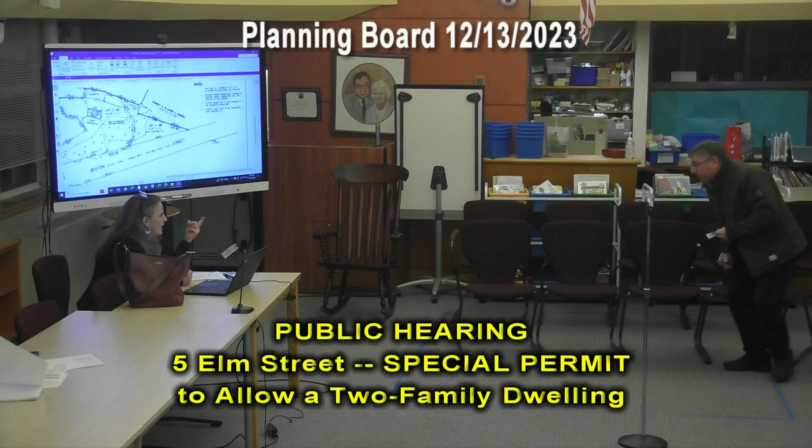Yeah, right now we just want to get the septic in and get ready for the winter. I'm chasing after a bunch of stuff now, trying to loam it before it freezes. All that rain killed us, but the septic's already been inspected and backfilled. Now we loam it, and then loam the backyard where the pool was after we filled that in - that's what we're trying to do probably tomorrow or Friday. Actually, he increased the amount of vegetation, because that pool was a big pool.

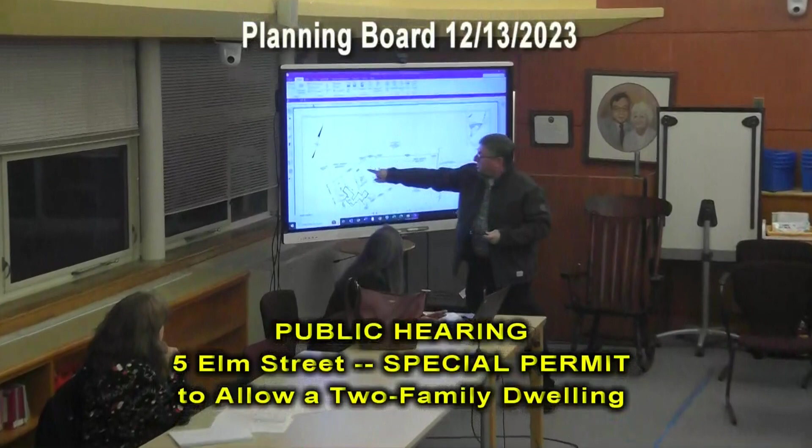So there is another lot that was created. A house will be built on this lot, 100%, correct? I can show you where it is.

We have another compliant lot. That's a lot they acquired. So that's 1 Elm Street, right? Yeah.

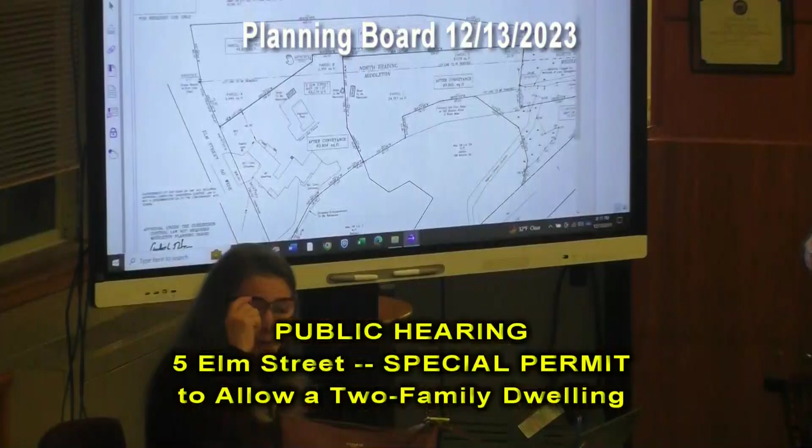So you can see where that property is above, but it can only be a single-family home, it's just too small. Okay, very good, appreciate it, thank you.

I will entertain a motion if no one has any additional questions or comments. I'll make a motion to accept the application from MJP Properties, special permit. I think we would have to review all the findings as well, as part of the approval.

Findings after hearing from all the interested parties and evaluating the evidence and facts presented to the board, at the public hearing pursuant to board authority under section 3.1.3 and section 9.4, Chairperson Carroll and Chairperson Anthony called for a motion that the beneficial impacts resulting from the redevelopment of the property and the conversion to a two-family home outweighed any adverse effects, and to issue the following findings.